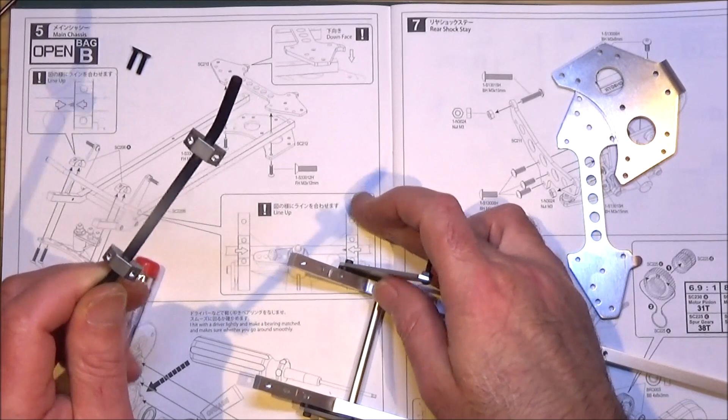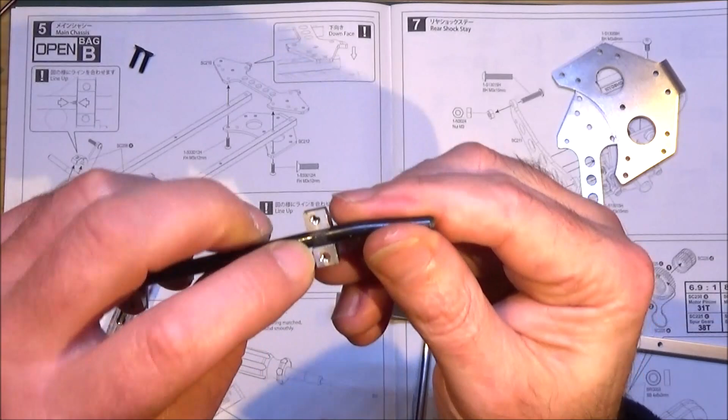Welcome to this, the first part of my build guide for the Kyosho Scorpion off-road racer. This is a beautiful buggy. I'm really looking forward to this because I've never built a Kyosho before, so it's going to be a little bit different for me.

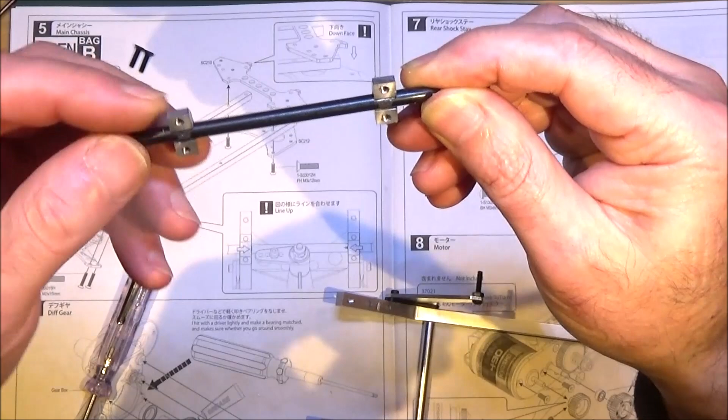Most of the parts in this kit are made of metal, aluminium or steel components, and there's a lot of adjusting and screwing together of all the little components. So I'm going to have to do some of it off camera or speed it up a little bit, just to stop you from getting bored along the way. But here we go. Let's start with step one, and we're going to open parts bag A.

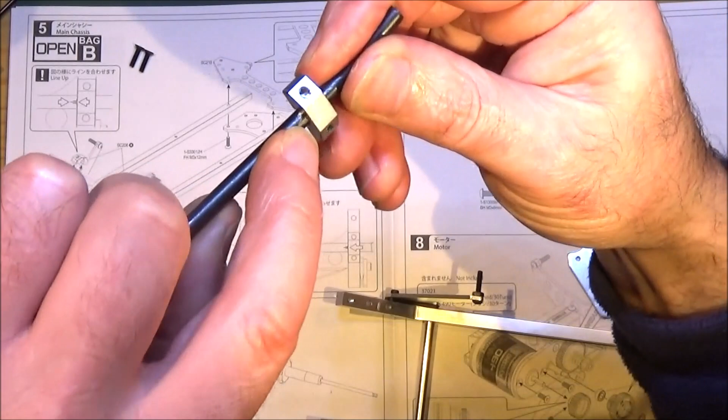So this part is doing the front of the chassis. As you can see, I've already done the first bit, which is on this side, putting on the shock upright, the shock stay. It's going to be exactly the same for the other side, so I'll just show you putting this bit together.

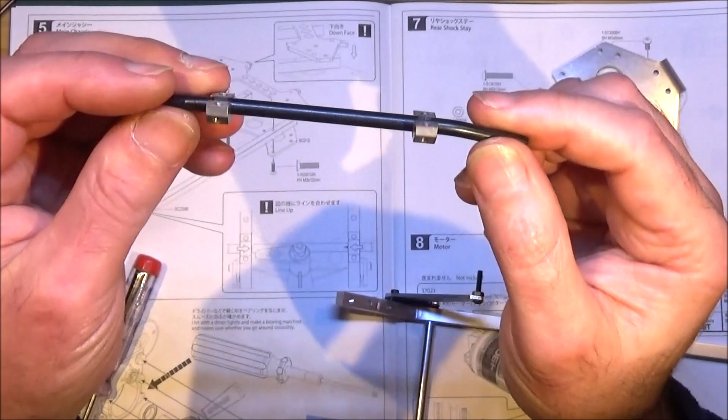You just need 2 cap screws, and notice the screws are different - you've got cap screws, button head screws and flat heads, so be careful which ones you get. Just check them with these diagrams. I think they are 2 sizes: a 2.6 by 8 and a 2.6 by 16. You need this plastic part here.

Note that there's a little notch at the front, and that goes to the front. Take the longer cap screw, put that through the back, then put your plastic spacer on, remembering to get that notch at the front. Push that through your chassis rail, and then screw that into this central bar, which is an SC237.

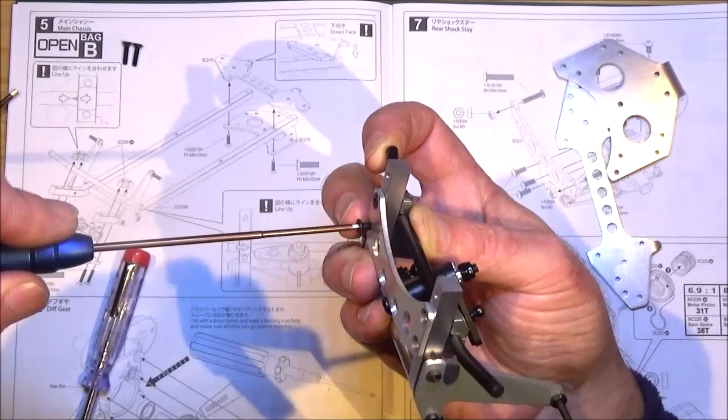Then take your smaller cap screw and just thread that into the actual chassis rail itself - there is a thread inside the rail for that screw. To finish this off, you just need this cap screw, which is the rounded head that goes through the top of the damper stay or shock tower, and then you simply secure that with a 3mm nut.

And it should look something like this at the end of step 1.

So step 2 is the servo saver, and this is quite fiddly to do, so I've done this off camera. You think you'd need like 3 pairs of hands to do this. It's quite tricky, but overall it's not really that complicated.

So basically what you need to do is get your plastic parts. You've got the numbers here, SC226B6, and this part here, 226, part number 5. You've got the number on the parts tray which shows you the 226 bit there, and then the part number, which is in black, number 6 and number 5.

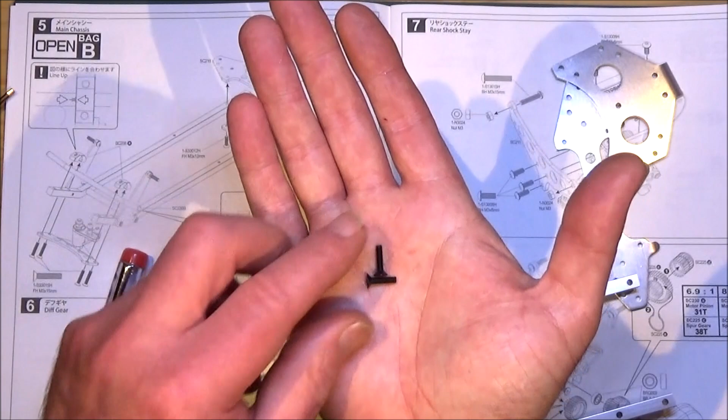Once you've got those, you've got the small threaded ball joint that goes onto the arm here, and you just put in the cap screw from underneath, the 8mm cap screw. That's quite simple, just screw that on. Hopefully that's in focus - it's through the second hole from the inside.

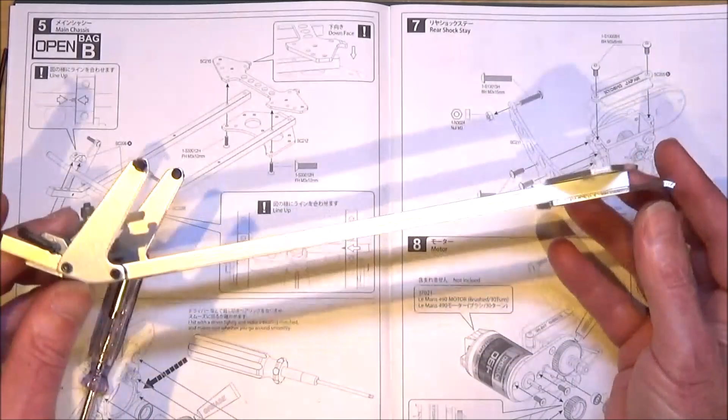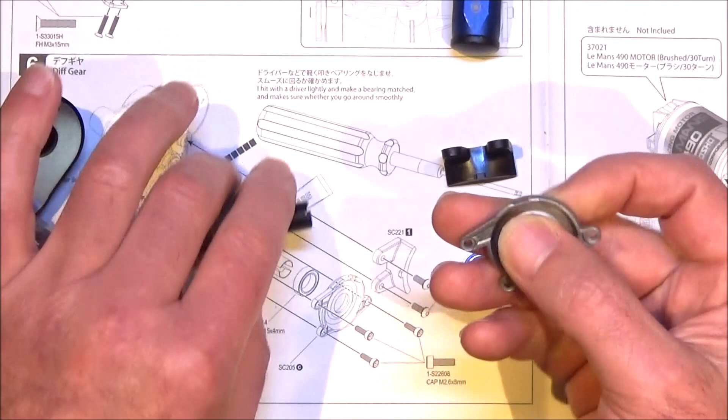So basically put the nut on, screw the ball joint through, and then screw the bottom nut until it's flush. Then get the supplied spanner and tighten the top nut down onto the bottom nut. You need to get those nice and nipped up - we don't want them falling out. Make sure that you get the bottom flush, and that's the end of step 2.

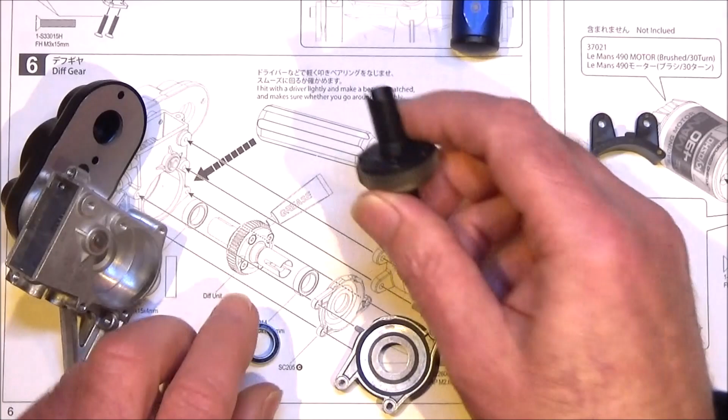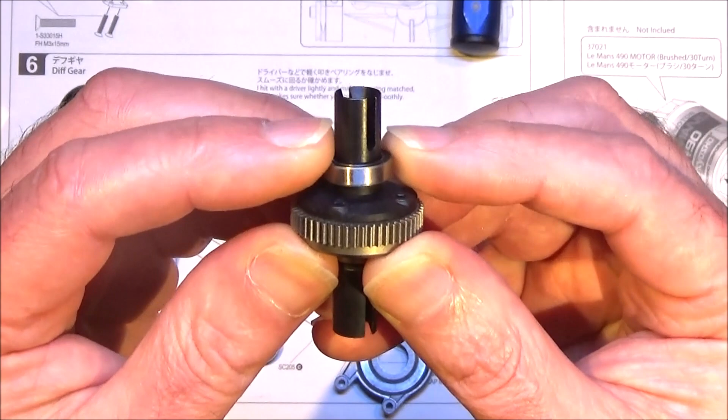Step 3 is the servo saver again, finishing that off. This time you need this kind of chrome tube. You need the spring - push that over, and insert that in there. It's quite tight with that spring. Note the orientation, so it needs to go like so.

Push that down, and then you've got to get the circlip on the top.

Yeah, so that's like that, and you can really feel then when you try and turn it, there's quite a lot of pressure there. So yeah, that's the servo saver finished.

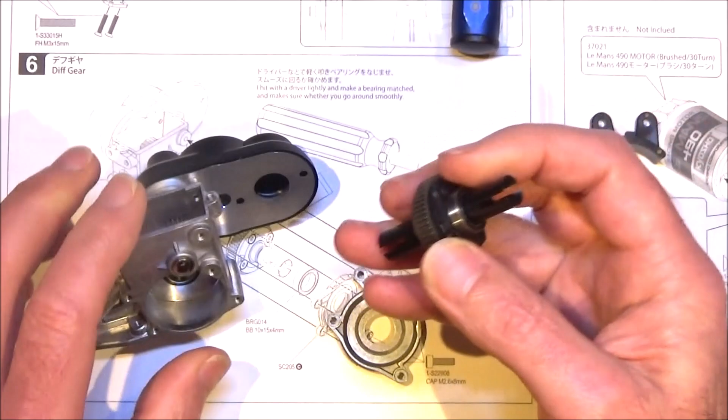Step 4 is mounting the servo saver. So you need this aluminium bracket. You need to push this large 35mm cap screw through the middle there, and then put on the plain nut. Make sure you give that a good nip up.

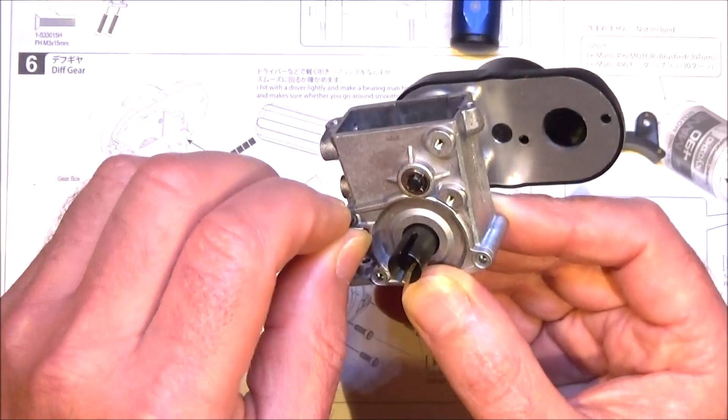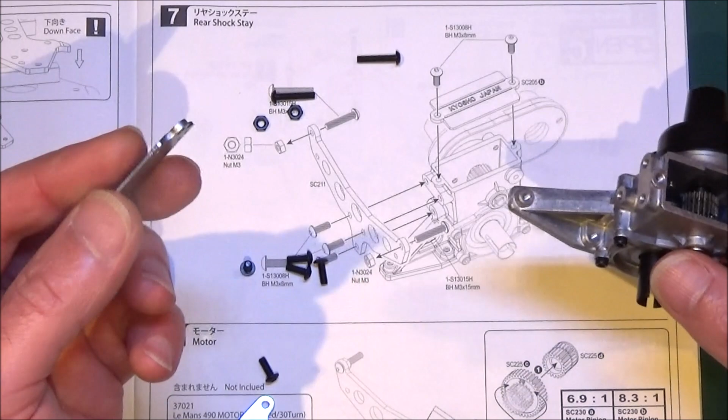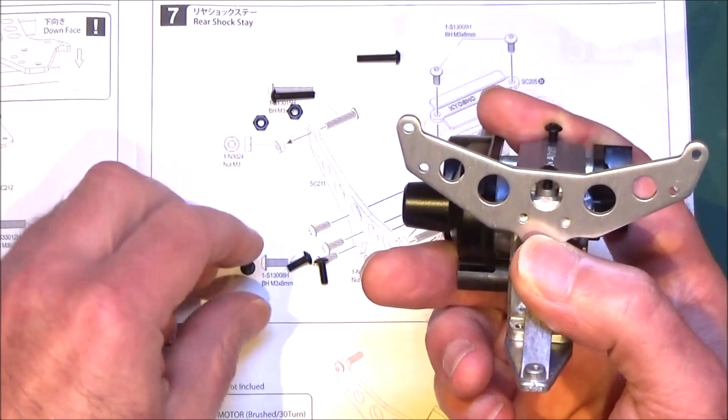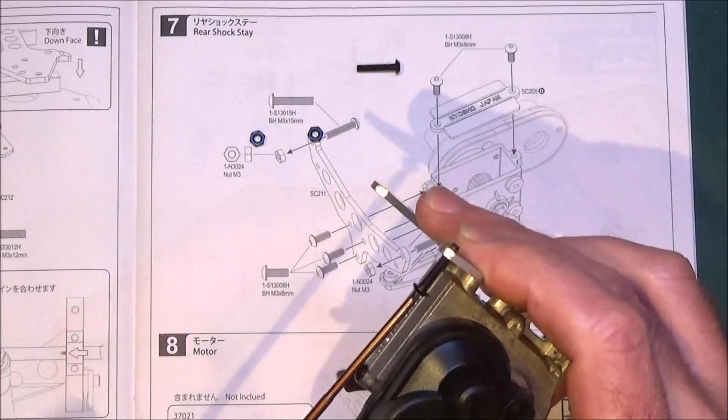You've got this little bracket, and you've got to insert this bar, which I think is the front axle. So right, this is tricky. We've got to get this the right way around.

Okay, so I just had a problem. I've just gone away and come back again. I think I've got a solution. It's quite tricky, this, I must say, so you have to pay really careful attention to what the diagrams are actually showing here. And if you don't get it exactly lined up like it shows, you're going to get it all wrong, as I've just found out.

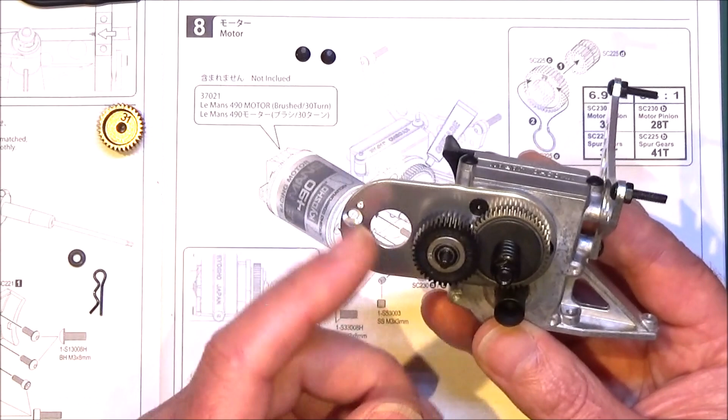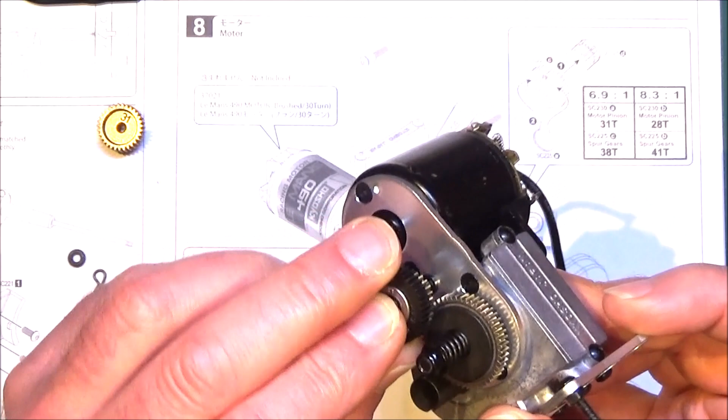So right, here we go. These aluminium brackets, I couldn't get them to sit over the bar where there's like a knurled section where the brackets have to go, and that knurled section is standing proud, and it wouldn't let these brackets sit down over the bar. Well, not at that point though. It would in the middle, but not where those knurled sections are.

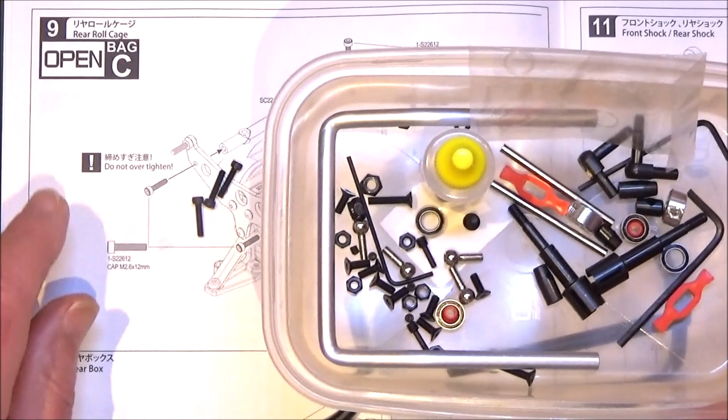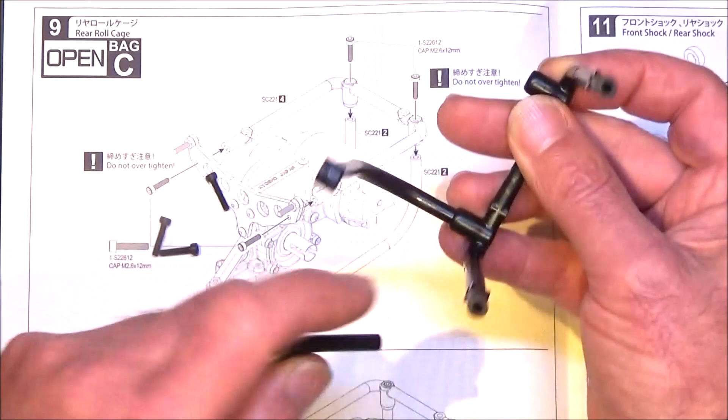So I've had to just slightly, I've got a little file, and I've just taken a little bit out of the front and the back of each of these slots, not the top, but the front and the back, and I've managed to get them so they're a real tight fit. But I've clicked them on, and you might be able to see in this light, the markings on the bar are there, and there's one tiny little mark there, so you can get these lined up, and the centre of the 3 marks on this bar have got to line up with the tiny little notch that's on that aluminium bracket. So anyway, I think that's quite right now.

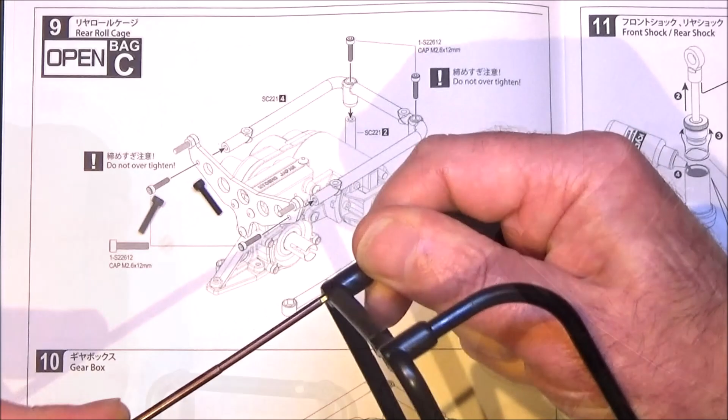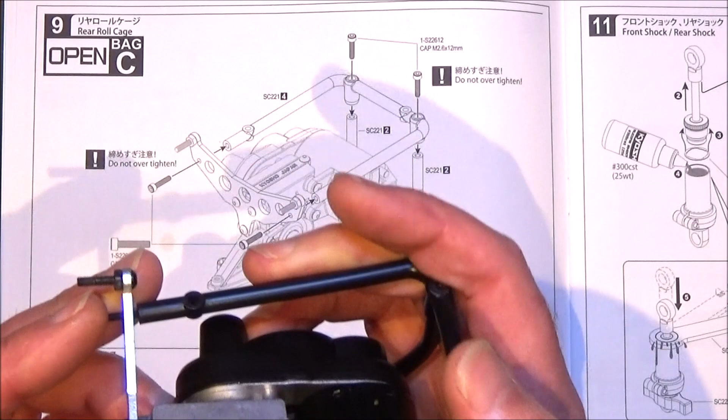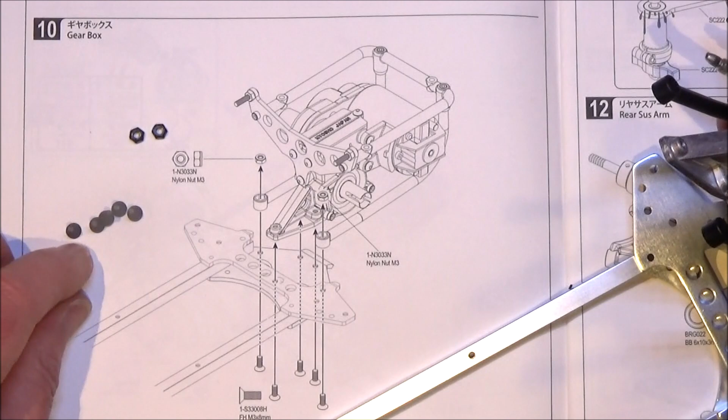And what I recommend doing is just adding tension slightly to the one screw and then swapping to the other. Don't tighten one fully up, because obviously that aluminium part is pulling down on the bar. We want to get that kind of even pressure on both screws. So just alternate between the 2.

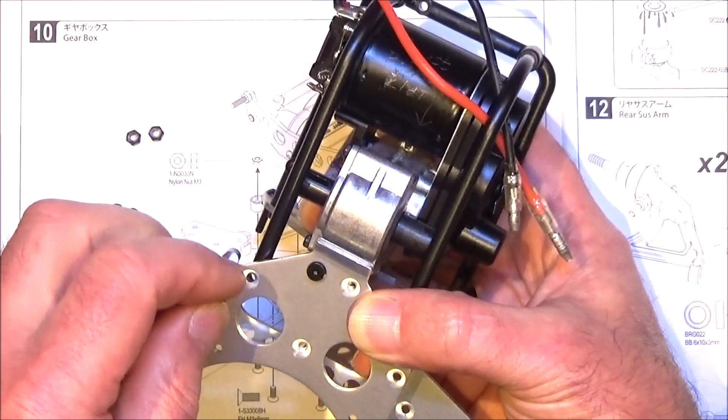And you might be able to see you can't screw this down flat onto the chassis rail. There's going to be a tiny gap between that aluminium bracket and the chassis rail, because the bar's diameter is bigger than the hole. So yeah, don't try and clamp it so there's no gap. You won't be able to do that.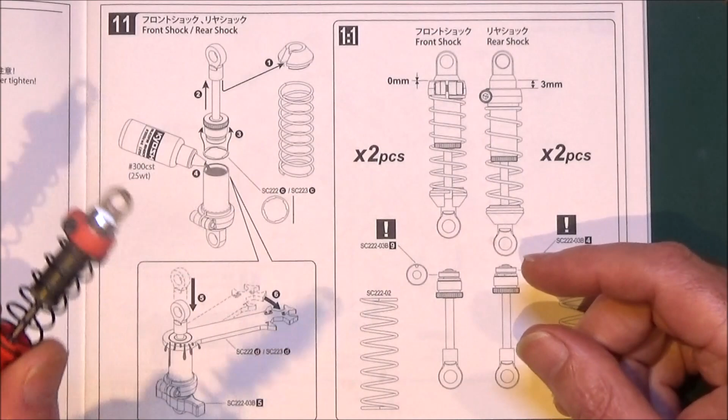So I'll just get the other side done the same, and then hopefully we can get those 2 plates on at the back. Yeah, and these don't line up exactly, so you have to do a bit of wrestling to get the aluminium in the right position to get the screws in the holes, but it does go in the end.

I've got to say, this is a very different RC building experience for me compared to a plastic kit, but I really am enjoying it at the same time, so all good.

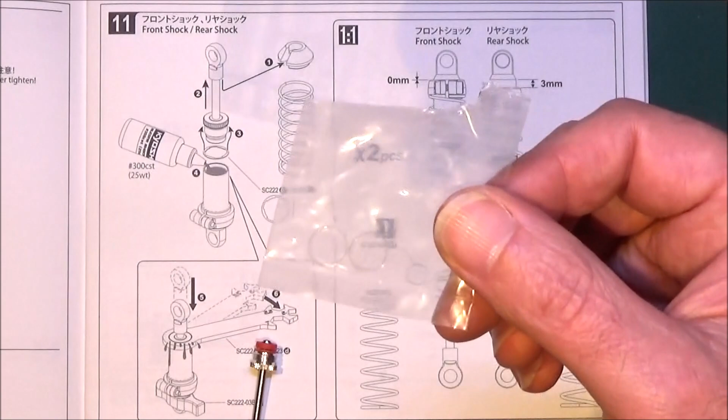Okay, so I think that's how we should be looking. Those 2 rear plates, it's just the 2 12mm countersunk screws from the bottom, and by the look of this, got to make sure that these are pointing down, so that curve there and these 2 points need to be curving down.

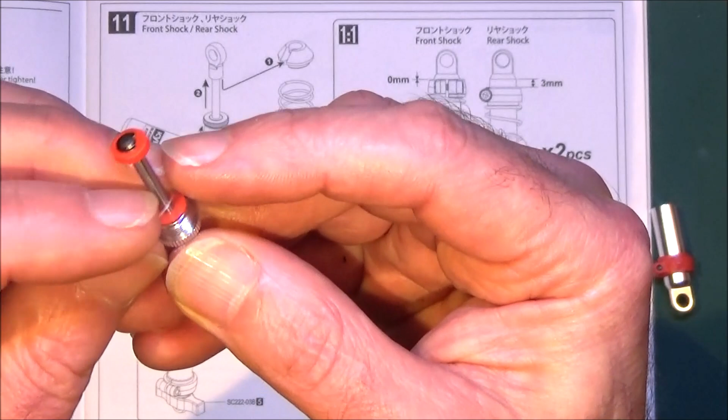Okay, so yeah, these are pointed down. We're starting to make progress now. It's looking a bit like a chassis.

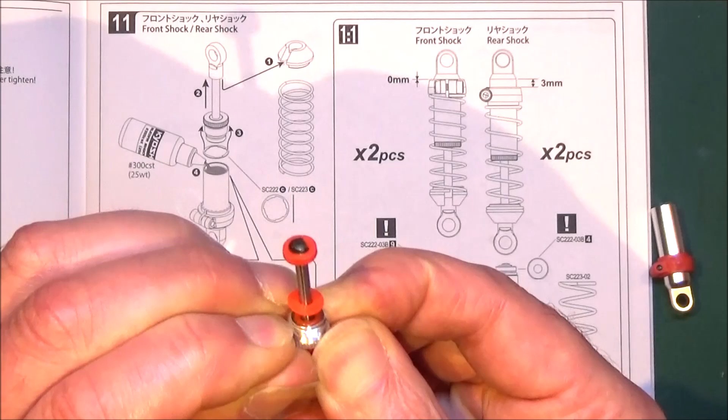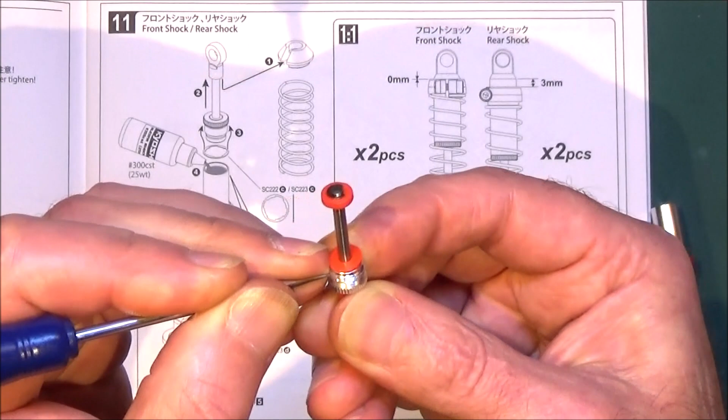So the instructions go on about hitting with the driver lightly to make the bearing match. I think that means to get it inside the housing there. It looks like it's going to be a tight fit.

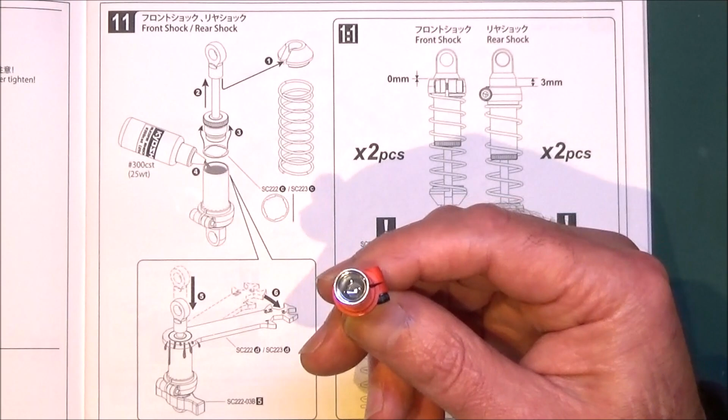I've noticed, just a quick try on the diff, that on the light side it slips on quite easily, but on the darker side it really doesn't want to go down, so you're going to have to use some force here. What you want to do though is make sure that you get the bearing square before we start pushing it down, because if this goes at an angle, it's going to dig in and get caught, and you could end up damaging the bearing trying to get it off again.

So yeah, let's try and get these on. I'll let you know how I get on.

Okay, so that went quite easily straight into that, didn't need to hit it or anything, so it's just this one that's going to be a problem. I'm going to try and use the carrier and add a bit of force to pull that down and get it seated.

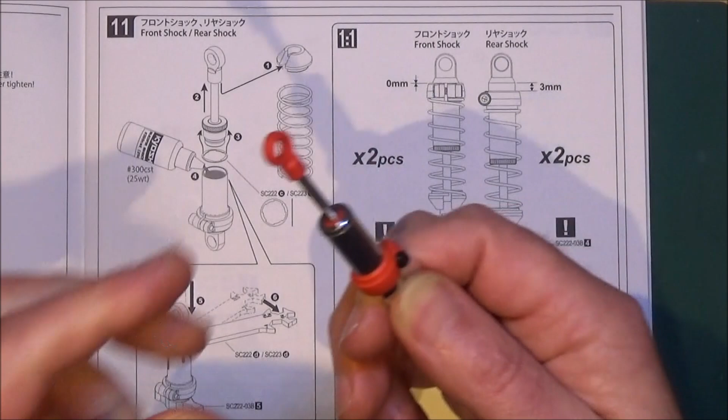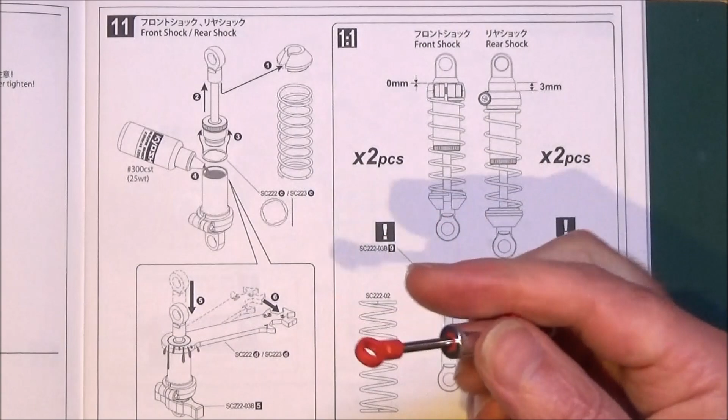And then we get the cover, and that's got 3 8mm cap screws holding that in. And to hold on the plastic part, you've got the 2 button screws, 8mm. And it should look like this at the end of that step.

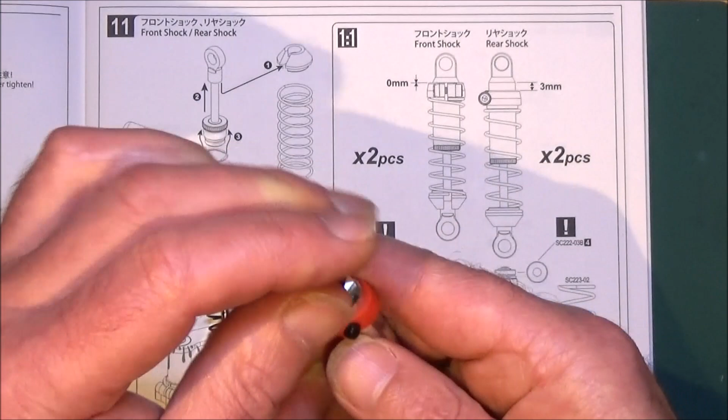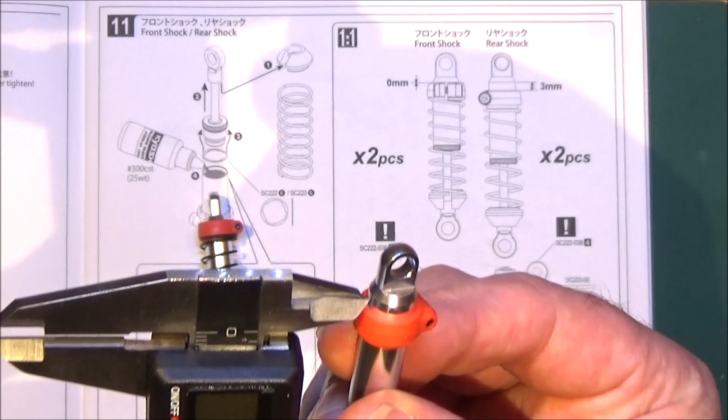Step 7 is the rear shock stay. Well, before we do that, we're going to put this metal cover on the top there with 2 of your cap screws, button screws, 8mm, and then the stay itself goes onto these 3 holes on the gearbox there.

So again, it's those 8mm cap screws. I keep calling them cap screws, they're button screws. So once you've done that, it should look like this, those 3 screws there and the 2 in the cap.

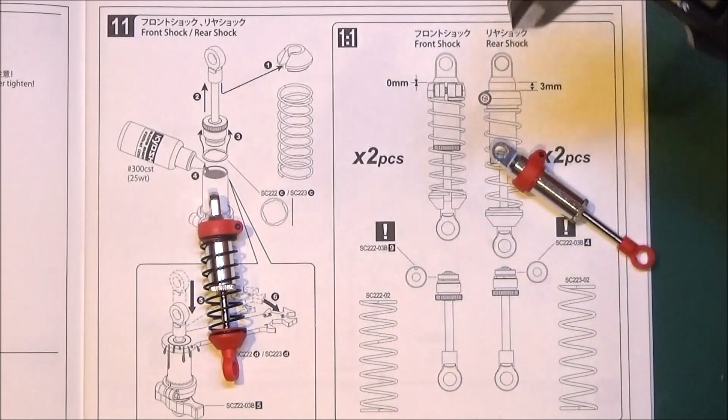And to finish this step, what we need to do is get the 15mm long screws, put them through. Need a bit of help with the screwdriver, even though there's not a thread in there. And simply hold those in place with 2 of your 3mm standard nuts. And that's the end of step 7.

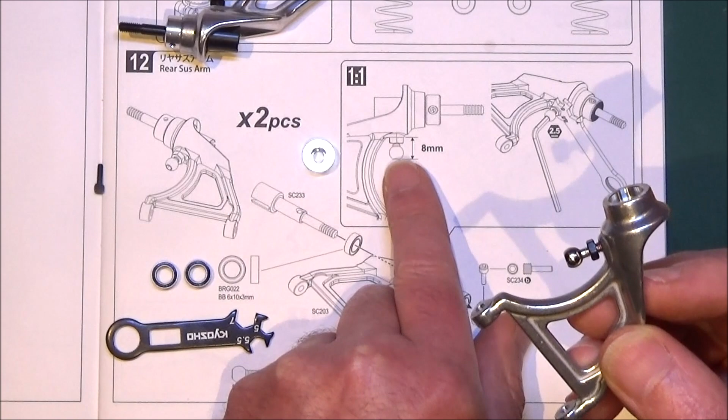Then it's simply 2 of the countersunk screws, like so. Put that gear back on.

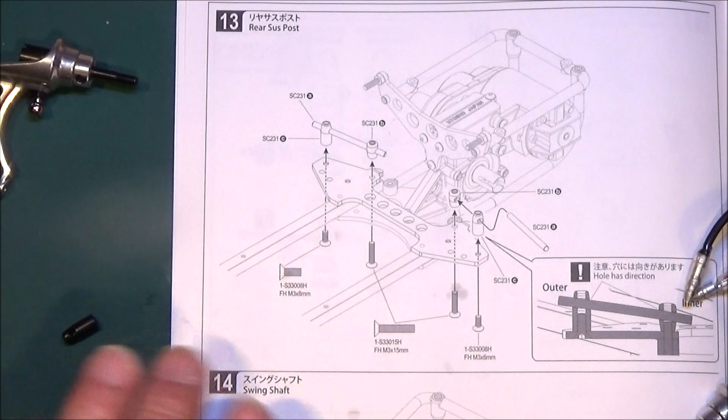So all we need to do now is get some grease on these gears and slip the cover back on.

Step 9, time to open parts bag C, for which you'll need from it these 4 12mm long cap screws, and you need 3 plastic parts. Easily find these in the bag.

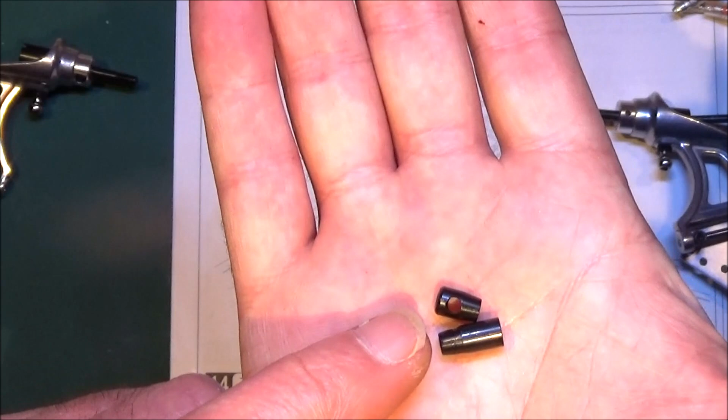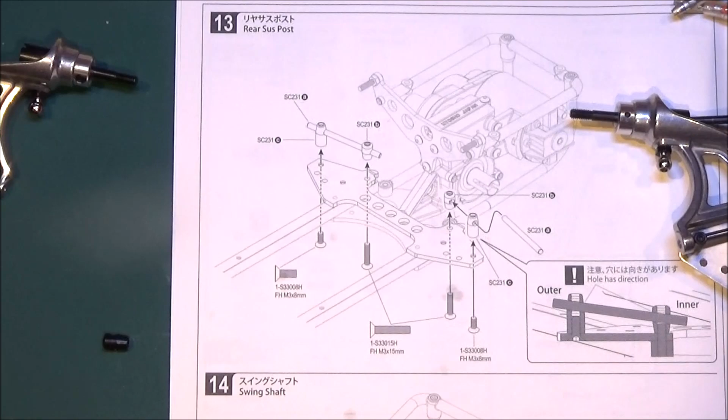Basically, I've already put the one on there. You just basically insert that like that and simply screw in your 12mm screw, and as it shows, because you're screwing into plastic, don't go mad over tightening this part. And it's simply a case of you've got a screw in the shock tower there and there, roll cage that you've just made, and we're just going to secure it with those 2 screws.

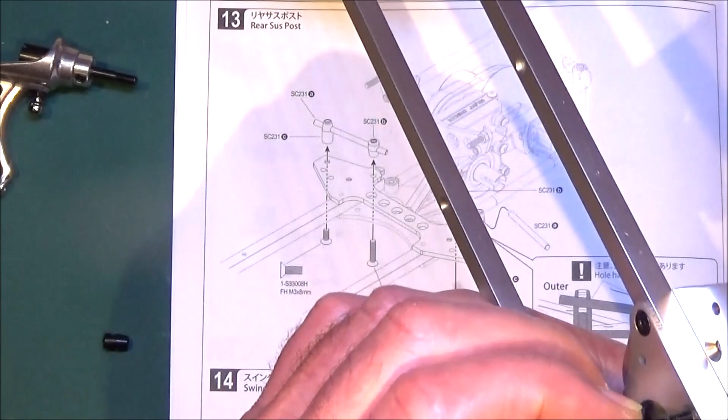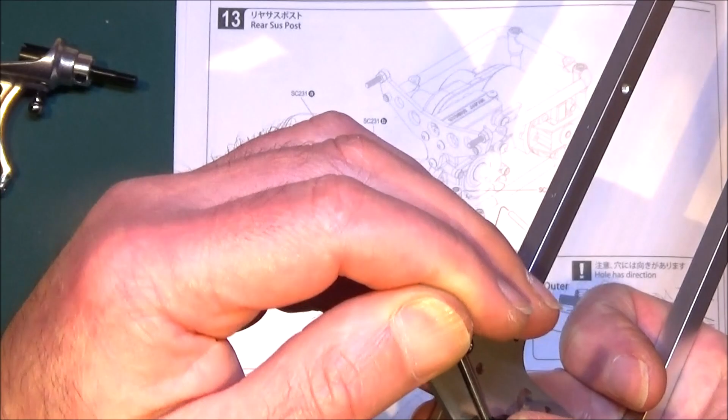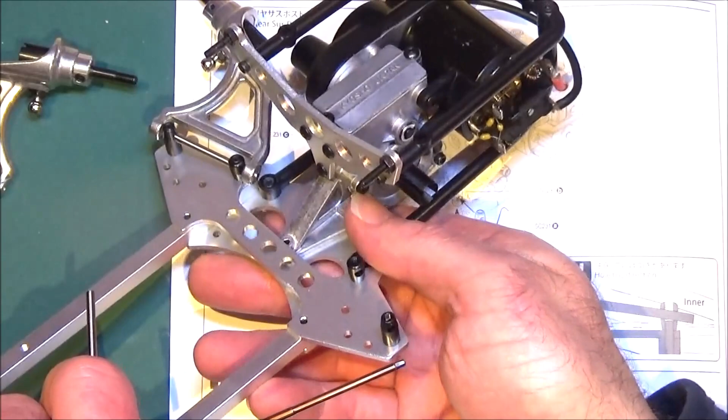You just get those 2 done up, and it's on step 13, which is attaching that gearbox assembly to the rear of the chassis. You're going to need 5 of these countersunk 3x8mm screws and the 2 little black lock nuts - they're nylock nuts, and they're going to go in the plastic part. Basically you line this up. I want to get these 3 into the actual gearbox aluminium housing itself first, and once those 3 are in place, you can get one of those nylock nuts and try to get it into the top of the plastic rail. Those holes the nuts go into are kind of hex shaped, so they're captive - you don't need a spanner to hold those. Just insert the 2 8mm screws and tighten them up.

Step 15 is the front and rear shocks. They come kind of pre-assembled like this, but you need to take them apart because we've got to get some oil in them. Just take the bottom clip off and your spring, and then just unscrew and get the piston out.

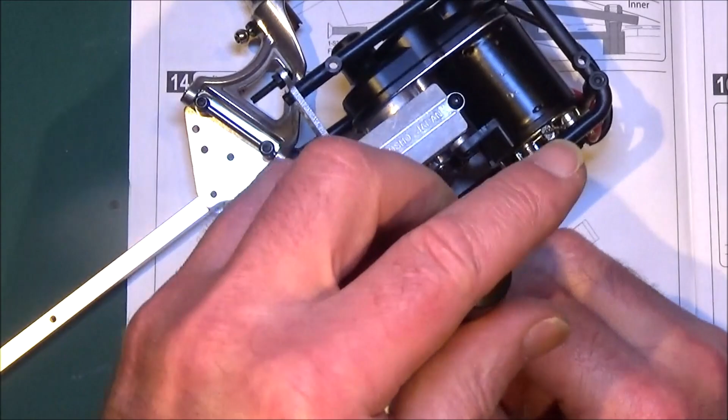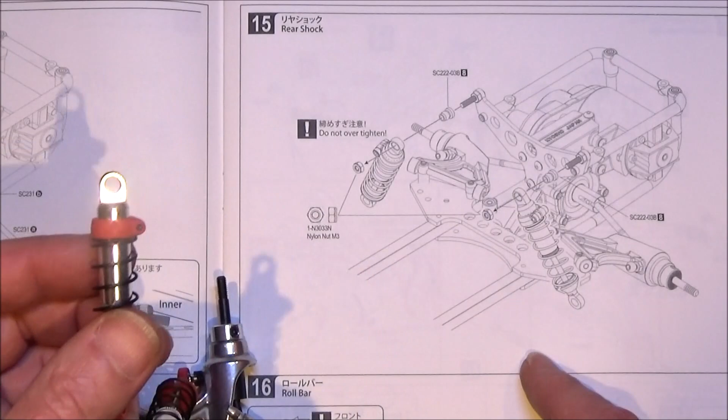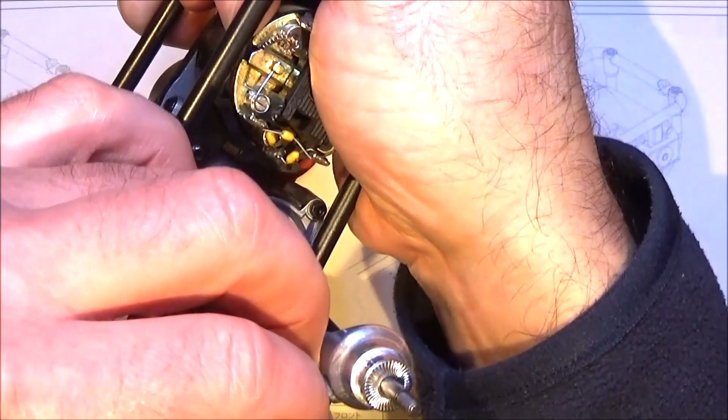Now you'll get a little bag, and inside - I don't know if you can see it in the shadow there - are 4 little gaskets. I don't know if you can see them there in the reflection, but yeah, they are there. I think they're made of polycarbonate or something like that. They're tiny little things, and you've just got to put 1 on each shock. Put it over the piston, then get it over the threaded part, and it's got to sit right at the bottom of this collar. I think it's a seal, but I've got to say, guys, this is one tricky little so-and-so to get down.

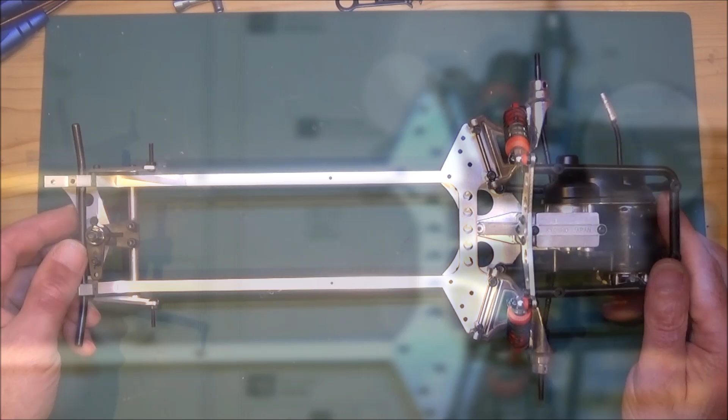It really is. Luckily it's made of pretty tough material, so I managed to force it down a little bit, and then get my bradawl and very carefully tease it down the threads. It doesn't want to go, I tell you, but bit of perseverance and you'll get it down there. Just be really careful, because you don't get a spare, I don't think - you don't want to lose one of these or break it. I don't know if we're focusing on this, but trust me, it is on there, right at the bottom. You've got to do that with all 4 shocks.

So once you've done that, get your body and fill it up with shock oil - this is provided in the kit as well. As it shows here, it shows all coming out, and I've done one already, and I'll tell you what, it does come out. Be careful, nice and steady, and you'll need some cloth.

Just pop that in really slowly, and you need to try and get all the air bubbles out. You might want to leave the shock upside down for some time to let the bubbles come to the surface. Just tighten that up. Yeah, what a mess of oil everywhere, but I think the more that comes out obviously shows you've got it filled right up.

So then you just need the tools provided. You hold your top eye, or the top hole, with that part, your spanner, and just tighten that up - that's how you do the shocks. Just put it back together, and make 4 of them.

Just one little note as well - check the front shocks. It shows that the collar, the red collar there, is right at the top of the shock body itself, 0mm, and the rear shock needs to be 3mm down. Now you can use a ruler, but I find one of these digital calipers really useful - I think this is only about 5 or 6 quid. So you can get that set nice and accurately to your 3mm, 3.01, I think that'll do. You can just check then that you've got the right distance for that collar. This will also come in useful later on, as you'll see, where we've got to measure down to a couple of 3mm now and again. So bit of a tip, if you can get one of these, nice and cheap off the internet, job's a good one.